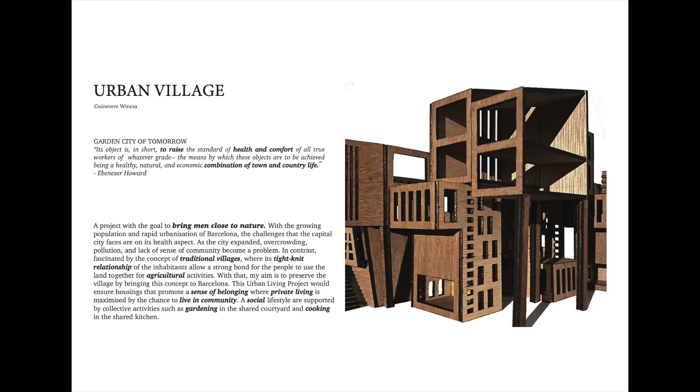A collective is built upon the same love for planting that the housing could encourage an exchange of knowledge to happen through the enjoyment of a social lifestyle such as gardening in the courtyard and cooking in the shared kitchen. As potential inhabitants, I researched the profiles of several activists, biologists, and urban farmers to understand their lifestyle and interests. These people are the representatives that I base my model project upon.

The housing consists of a single flat share for 1 to 2 people and a family housing of 3 to 4 people, and tenants are divided into the short stay of a year or a long stay of 2 to 5 years.

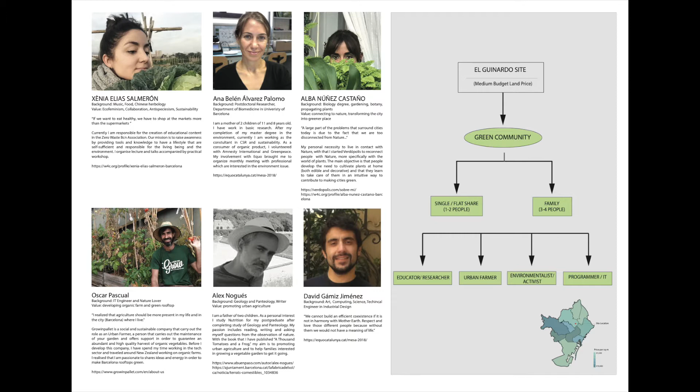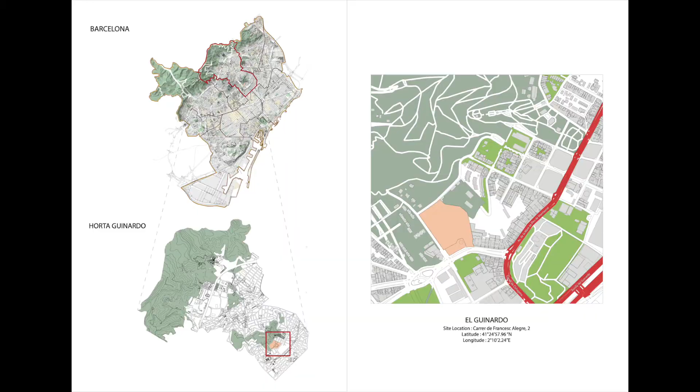As seen in the map of Barcelona, the northern region of Horta Guinardó is where the untouched greenery is. Working with the idea to bring men close to nature, I choose the neighborhood of El Guinardó to build my housing project. Highlighted in beige is where the site is, in which hills and greenery naturally surround it. Highlighted in red is the proposed site.

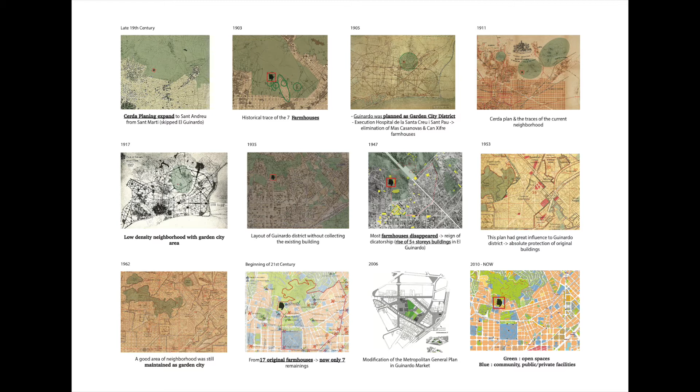This map shows how several city plannings eventually caused decline to Guinardó's farmhouses, which were their original identity. Urbanization expanded from the south to the north. The 19th century marked the start where Cerdà blocks were implemented in many neighborhoods. Here, Guinardó was planned to model a garden city district for a low-density neighborhood. Unfortunately, the reign of dictatorship replaced many farmhouses with taller buildings.

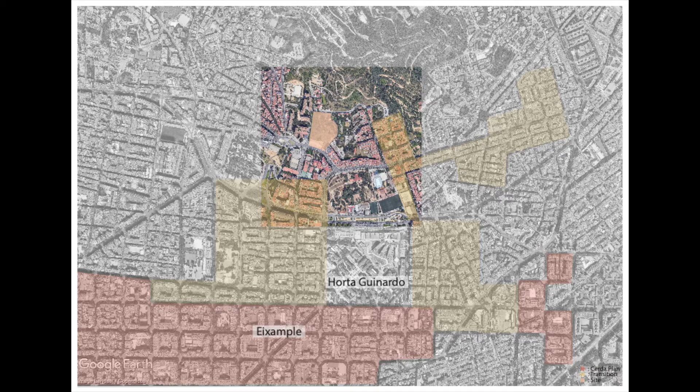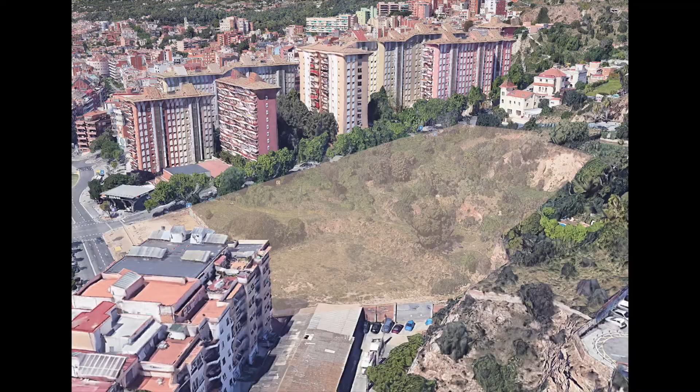The Cerdà block, highlighted in red, expanded from Eixample and stopped at the boundary of Guinardó, and the yellow is the transitional block in which blocks become rectangular and still with a chamfered edge. The block near my site may imitate one like Cerdà's, however, they are not one as they are smaller in size. Being close to the hill, the big topographical changes that happen in the site would influence my design process.

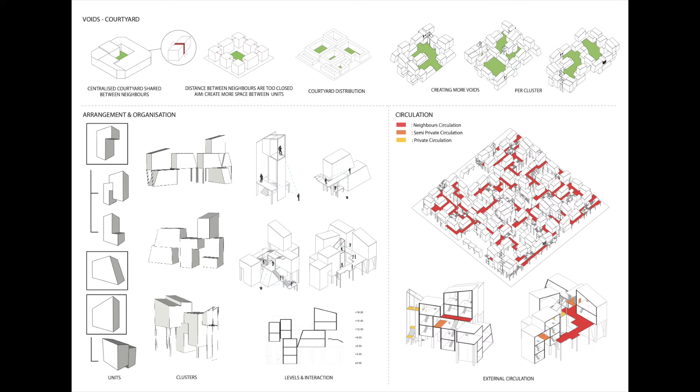To start, I'm going to divide my design explorations into 3 chapters: the courtyards, the units and clusters, and finally the circulations. The first principle: as I look at the void, a question arises: how can I bring the community together? Aiming to create a gardening spot, I approached the project by looking at the voids in a typical Cerdà block, where I noticed that one semi-private centralized courtyard is shared between neighbors. Therefore, my explorations aim to create more courtyards in each cluster and levels of public, semi-private, and private gardens to invite more people to be involved without disturbing the privacy of the inhabitants.

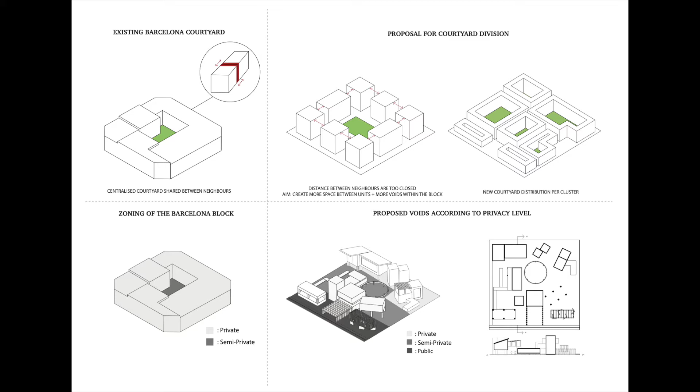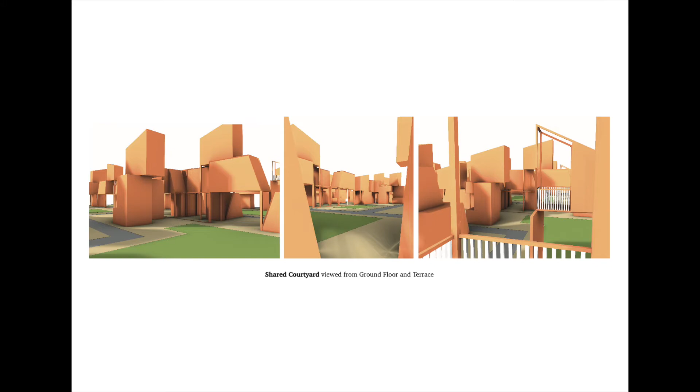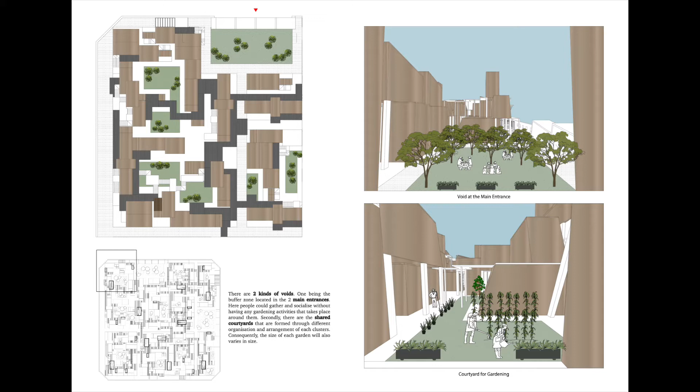In this intuitive model, I start exploring ways to create a void at the main entrance and a shared courtyard within the cluster. This is how the open space would be experienced from the ground and terrace. The images on the right suggest 2 kinds of voids created. First being the open social space at the main entrance, and secondly, the garden courtyards that are formed as a result of the arrangements of each cluster. Consequently, each garden also varies in size, ready to cultivate different types of plants.

Looking at various types of gardening, inland is a traditional method. Alternatively, the community of Huertas in the Sky uses a method of turning the rooftop green. The Urban Village project aims to support the community by providing a socially driven dwelling place and garden to plant for consumption or to sell for their own additional income.

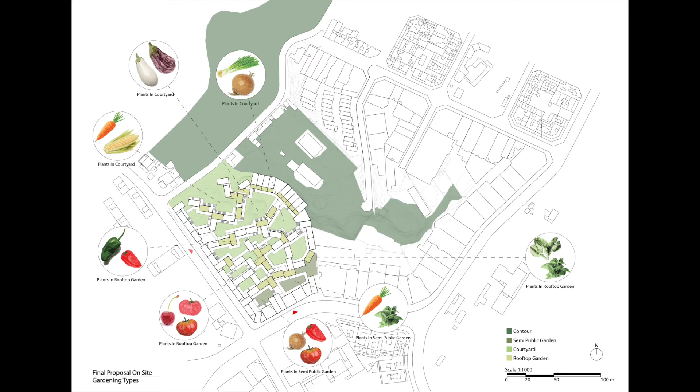I researched plant varieties that originate from Barcelona so that I could ensure the growth level of these plants. From there, I distribute the types of fruits and veggies to be planted inland at the public courtyard and cluster courtyards, and finally, smaller plants and flowers at the roof and private gardens.

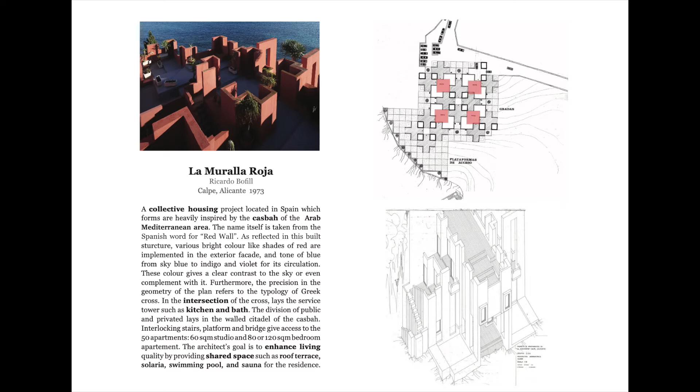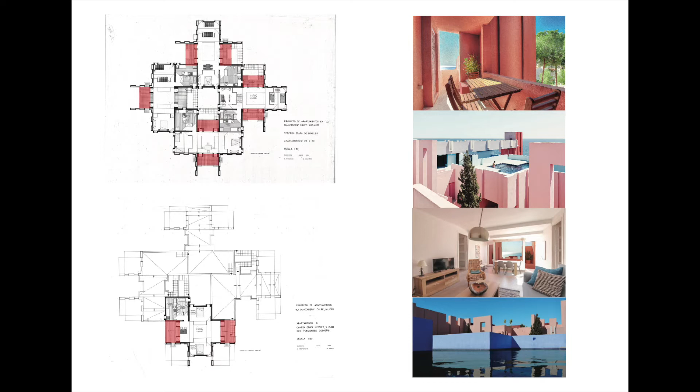Ricardo Bofill's work La Muralla Roja in Spain became an inspiration. Here, the concept of casbah is used to make housing with usable rooftops. Casbah itself is a Mediterranean Arab old town condensed as small buildings, almost like a village. Within this project, the spatial organization and interlocking of circulations become an important moment to create privacy as well as connections for communal programs.

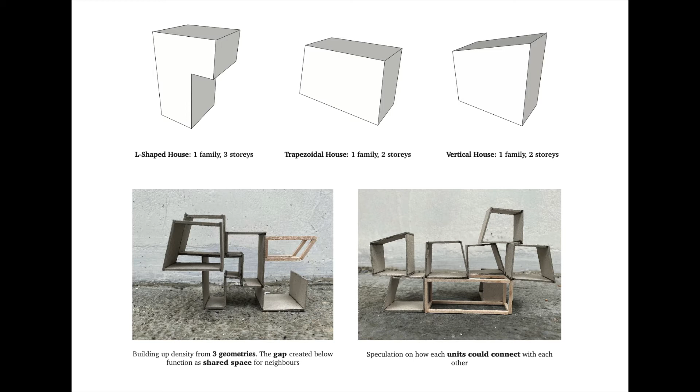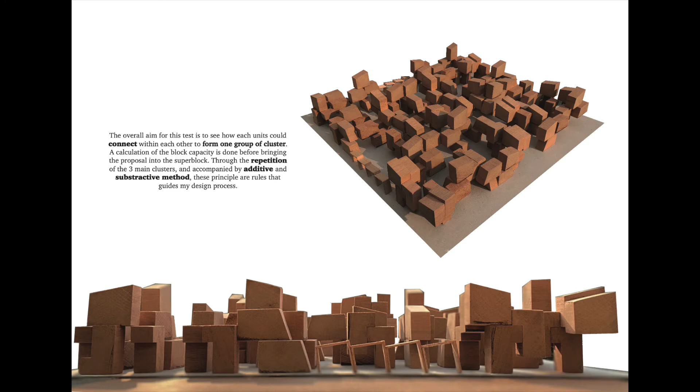Secondly, the units and clusters are my form-finding explorations to find the desired arrangements of the inhabitants' houses. The first tests begin very intuitively. However, these 3 geometries later influence the appearance of my units. Gaps seen in the model further suggest the opportunity for connections to a shared space. There are 3 types of block repetitions used. These explorations show how units begin to unite as one group of cluster. Through repetitions accompanied by additive and subtractive methods, these principles guide my design process.

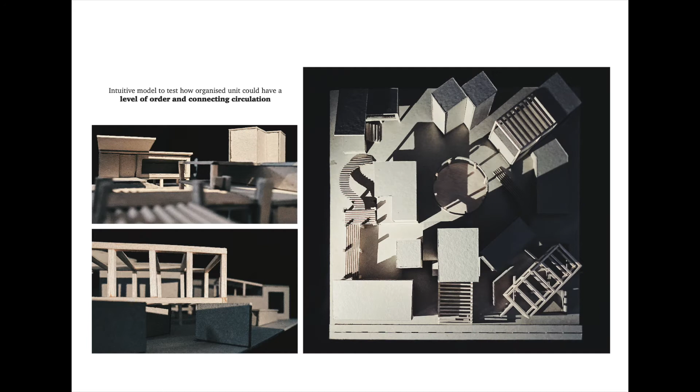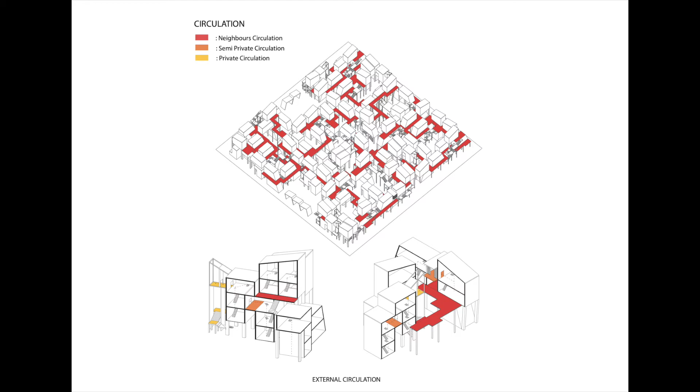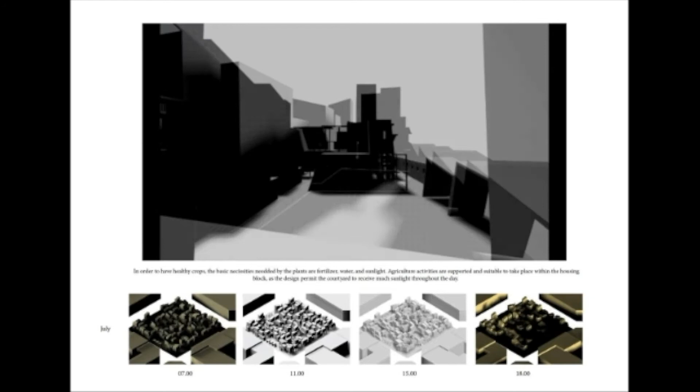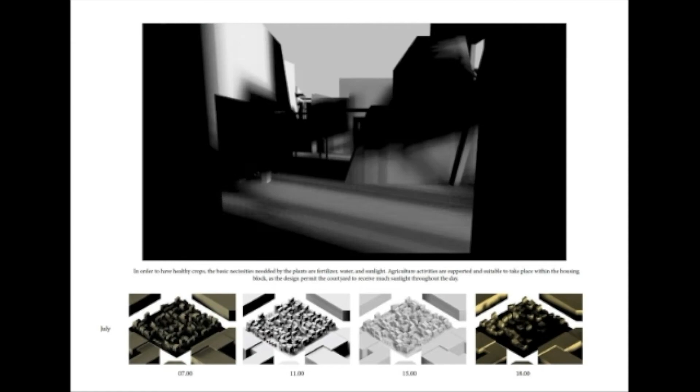As I wanted to make gardening activities in the courtyard as well as raising the health and comfort level of the inhabitants, I conduct sun tests from 7 a.m. until 6 p.m. at several different spots around the block. The conclusions that I got from the test is that my housing are exposed to much daylight activities.

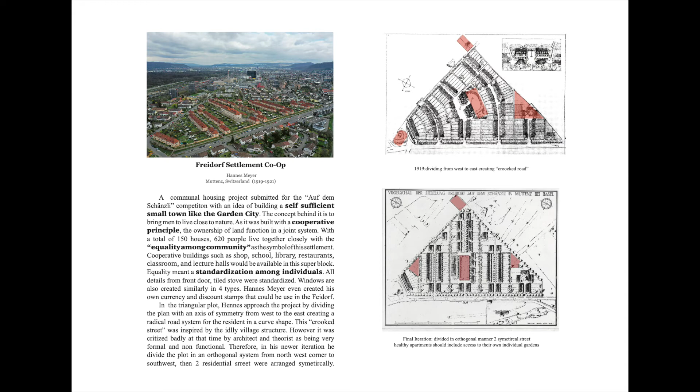To continue, I placed my design proposal on the appropriate side of El Guinardo. However, at this stage, things are still very regular that it does not blend into the contour. At the moment, these blocks only accommodate housings. So I look into the case studies of Hannes Meyer, Freidorf Settlement Cooperative in Swiss, if perhaps there are distinguishing programs or ways of living that characterize the spirit of a cooperative.

Here, Meyer designed a small town like the Garden City, in which housings are all standardized. However, communal programs are also provided such as shops, school, library, restaurant, and lecture hall. In the final proposal, I redesigned a bigger courtyard with a housing that starts to adapt to the topography.

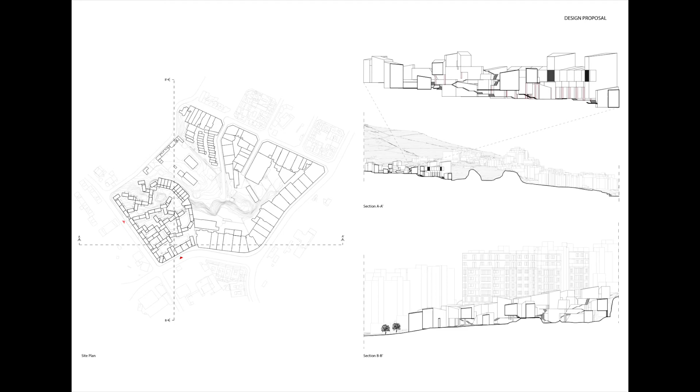Two entrances enable access from the main road and the side, and to ensure privacy for the tenants, communal programs are placed in the front structures in which weekly activities would run in the library, lecture hall, and workshop as free facilities for the tenants, while non-inhabitants are welcome to join with small fee.

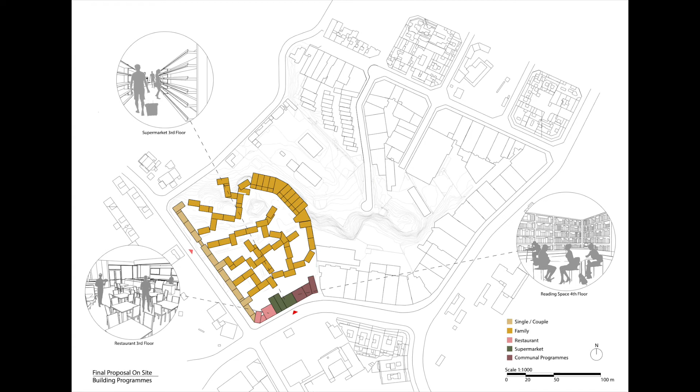And adding to the visitors' experience, public gardens are available for visitors to harvest their own food that they ordered from the urban village restaurants. Finally, market sells the freshly picked fruits and veggies to add income for the long-stay tenants.

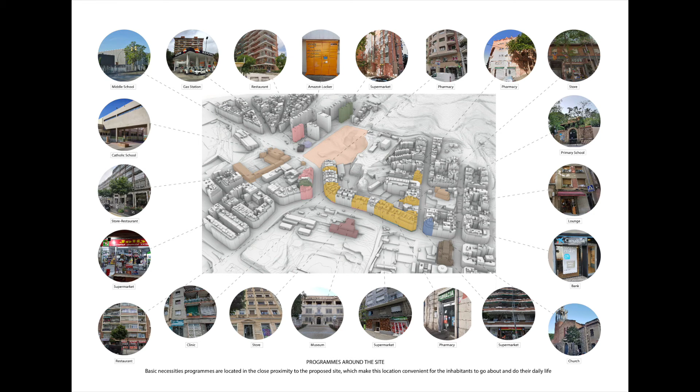With that, this housing project could be beneficial for the neighborhood of El Guinardo as this location is family-friendly. There are schools and pharmacies, but there have not been any built project that responds to the green movement. The circulations now also have been adjusted to fit perfectly as continuous walkways, so the interaction level from ground to platform level also changes, while the rooftop now is transformed to harvest small plants.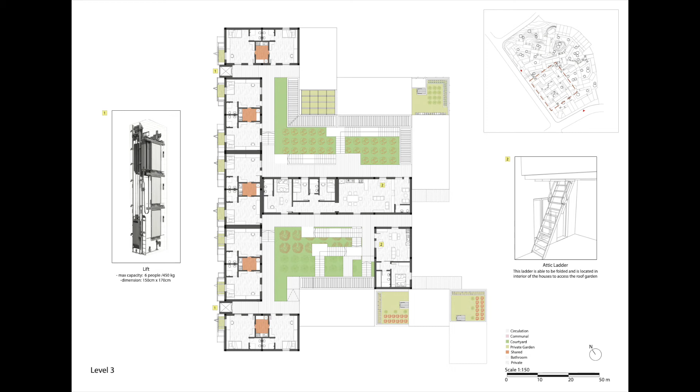Another type of shared kitchens are for the short-stay tenants where flatmates could cook together and build friendships as they come to learn. Besides staircases in the exterior, lifts are available for easier access, while in the unit's interior, attic staircases give access to private roof gardens.

Finally, a private garden is distributed based on the level of intensity. As the short-term tenants only stay for a year, they could commit to a smaller space in the terrace while also participating in gardening at the courtyard. For the long-stay tenants, roof garden or greenhouse garden are available to them.

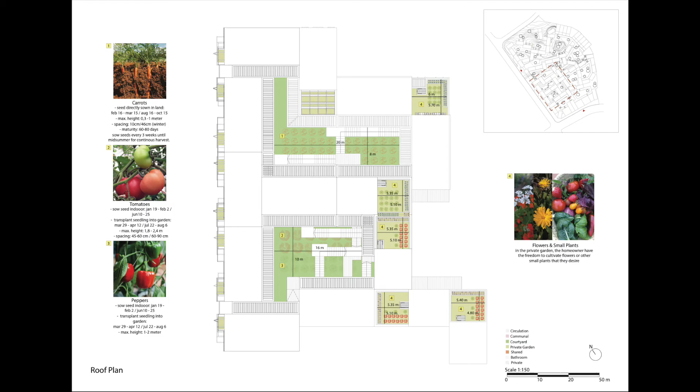There are various types of housing units, the first being the ensuite room with shared kitchen to be rented for a year, while the other type of shared kitchen exists larger in the long-stay tenant's house with two typical units of one master and one single. Besides cooking, up to 8 people could gather and dine.

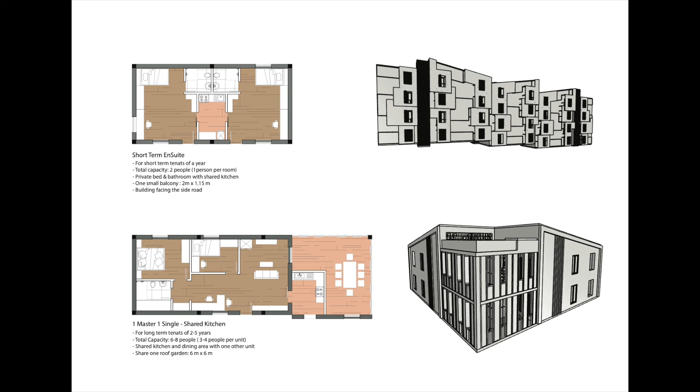The third unit type is located in the ground floor for an easier access. These are the priority units of 2 masters that could be reserved for elderly and disabled long-stay tenants. Their own individual bathrooms are made bigger in size and have handrails installed in bath for an easier use. These types also have the biggest shared living room that includes hobby space and cooking and dining room.

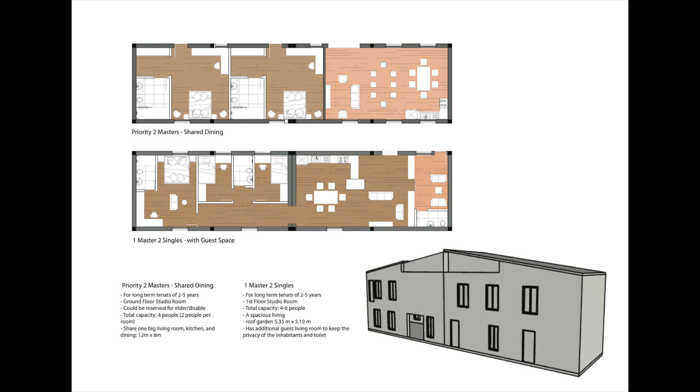On the first floor, a unit type of 1 master and 2 single beds have their own separate guest living room, so they could still have their own privacy without the interruptions of incoming guests. The fourth type is the greenhouse, where their private garden is slightly different in size. However, the first and second floor have typical units with 1 master bed and a private kitchen for 2 separate groups of long-stay tenants.

Finally, in the special case of the L-shaped house, the lower floor has 1 master bed for 1 group of people, while the first and second floor could be taken by a larger separate group with 1 master and 1 single bed provided. They could also enjoy a private roof garden.

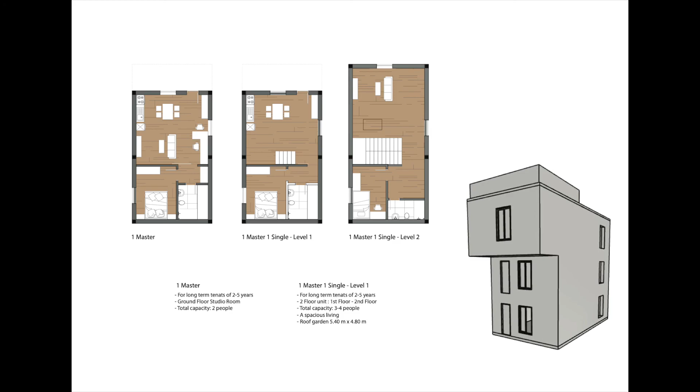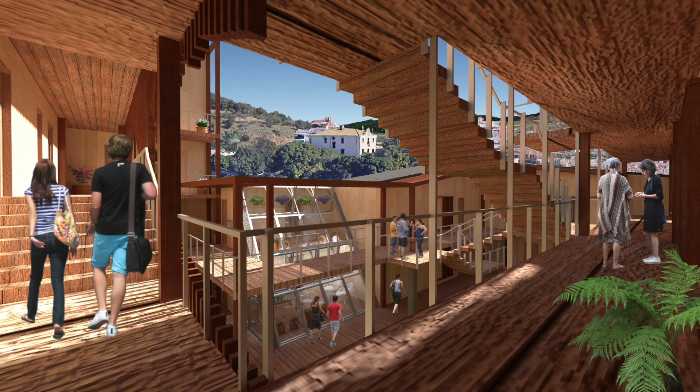As a socially driven cooperative, central activities happen in the courtyard where people could garden together or gather with their neighbors at the meeting point. This shows a typical day in the life of the inhabitants. As people circulate around the housing block, they could also enjoy an open view to the hill.